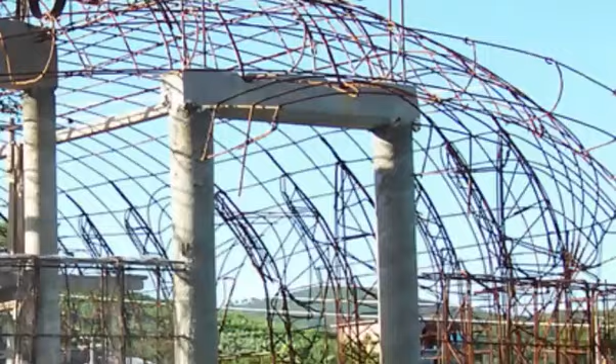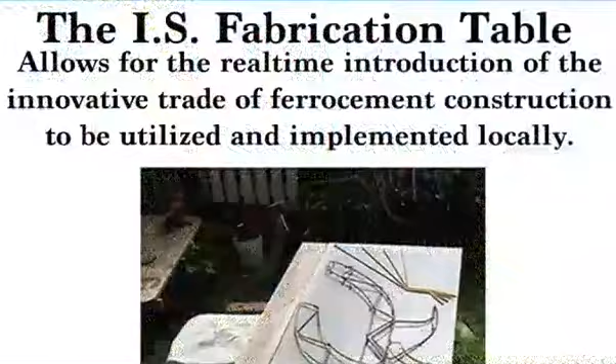There's a building that I constructed in Mexico, which everyone has seen in past presentations. There's the frame - this was done on site in Mexico, and the men working with me, when I would leave sometimes, decided it needed these columns because that's how they build in Mexico, but it does not need it.

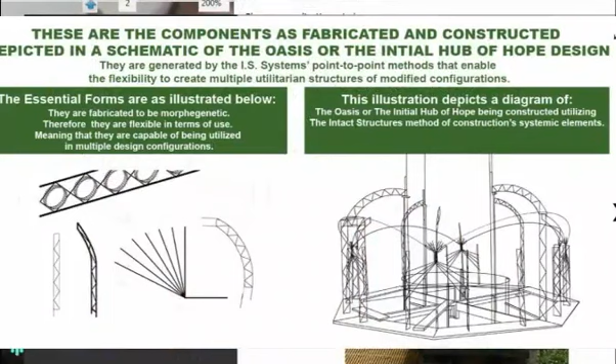That's a table in my yard. Most of my work is done in the design of the way to construct the building from these components, which you'll see they can do.

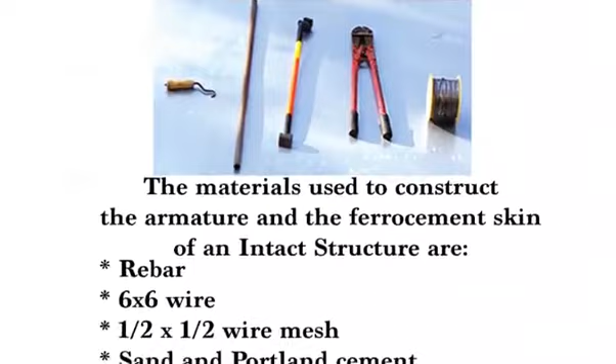I'm trying to move to the next frame. They can do multiple designs from approximately 6 components. Please move this - I don't know if I'm moving it or you're moving it. I'm not sure. Okay, this is an important design.

And the same components make this design, and I have it in my yard. Unfortunately, we can't walk outside and take a look.

Anyhow, the idea would be that it goes to where there are major problems, and hopefully there are no major problems in the future, but probably there will be, since there always is, right? And to introduce people to ferrocement construction.

Which can be taught fairly easily with this system, because it starts with point-to-point construction. In other words, the construction is built into the components. It goes together like a kit. This is more or less an illustration of the building that I built in Mexico, trying to illustrate the idea that in a tough place where people don't have much, with a few directors or supervisors, they could construct good, strong houses that would collect and store water and create a good circumstance in society.

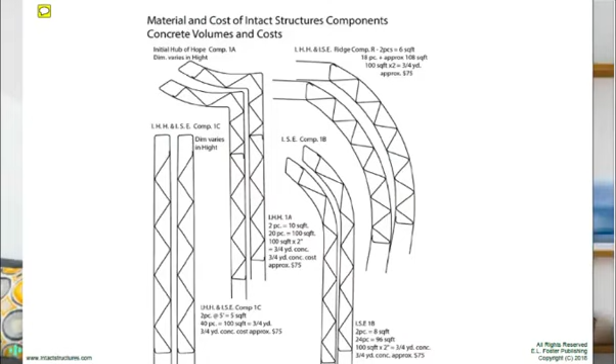And I've noticed something the more I get involved with it - it's micro maxi. In other words, the buildings, same components, you can ratio them in and out and make different dimension buildings out of the same components. Obviously, in construction, you could do that in many ways.

These components lend themselves to a ratio that I've made, which I will produce in drawings and templates that show easily. You say you want a 30-foot diameter, and I call it the initial hub of hope, the little hospital. When you get a chance, if you guys could look at the component schematics that I sent, there's another batch. Lele, did you see them?

I don't know if I sent them to you this time, but they're on my website - what I call the Asian intact structure. It has a sloping roof. Same components, by the way, and it's also in my yard.

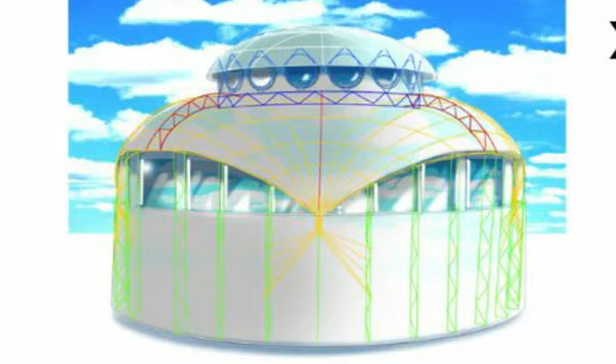I don't know if you remember, because it's not up yet, the initial hub of hope, the round building for the hospital or the food propagation. It's kind of a community building, not a house. That's a community building that had, and I'm very into this, the utilization of the attributes of ferrocement.

Ferrocement lends itself to catching a lot of water when it rains, holding the water, and making large planters, like I designed around the initial hub of hope. Ferrocement lends itself to more or less what I've written in the papers I sent.

One of the reasons they're round is because to get engineered in America, with the strength requirements, R values, and insulation requirements, you needed a cavity wall. The components do both things: they make a cavity wall and they add strength. Especially if they're precast, you can calculate their strength because it's predictable, just like the panels are predictable.

In terms of a pitch roof, I agree that as you came up, you could put the panels on. It would be the same system, you just attach the panels there. So I got it, I understand. It's not really a big difference, but there is one.

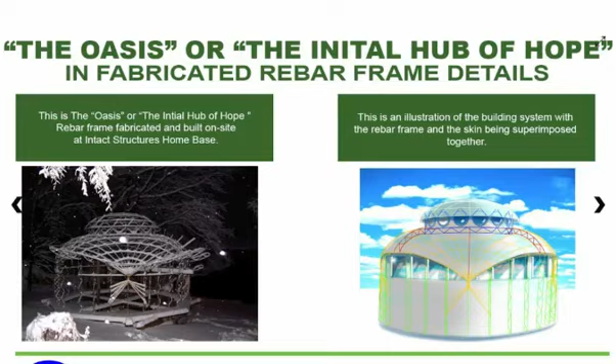Communities could grow food, go inside, prepare food, and make it much easier to feed a large amount of people in a small area that's isolated. And they'd have an earthquake-proof building that would have longevity. So anyway, there are advantages and disadvantages of both designs.

As Mr. Owen is giving stress on achieving strength through shapes and forms, simultaneously Mr. Lele is pointing out that we need conventional designs that people believe in, and it has to have good strength to bear earthquakes too, like a hybrid design. Now I would like to invite comments from Mr. A.K. Jain.

Sir, to my way of thinking, ferrocement structures in general do not require a foundation. That is my take. I may be wrong, but I have done it for the last 40 years, and no structure has given me a warning that it is not correct.

If the weight of your structure is about 10% of a normal structure, and the load you are putting on the ground is of the order of 3 tons per square meter, you don't need a foundation. The ground we walk on takes that much load and we don't need a foundation ourselves.

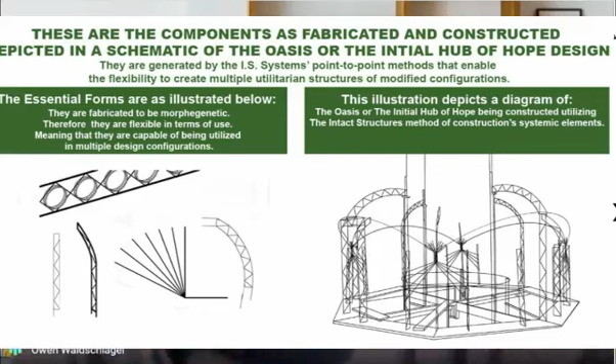There's no freezing floor in Mexico, so we use grade beams with rebar, like reinforced concrete beams. They were 2 feet deep and 8 inches wide, in a grid spaced about 10 feet apart. On that, we made a rebar cage for the slab.

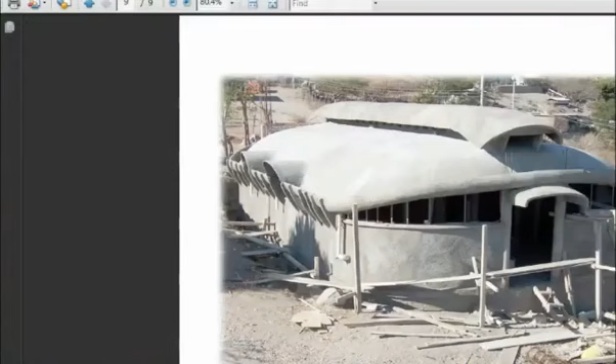We filled it in and compacted it even with the grade beams, very close, with gravel and a rebar grid with 6x6 wire. We poured a reinforced concrete mix with gravel and sand, like a 1-2-3 mix. It was a very good foundation.

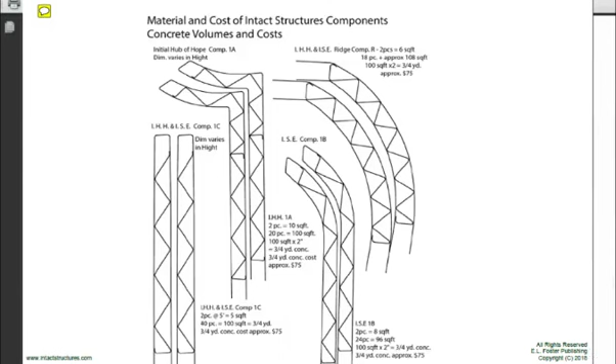We left a space for a 3,000-gallon water tank, which we put into that grade beam circumstance. So there's a 3,000-gallon water tank in the front of that building. That's the foundation that was under that, and that's an earthquake zone, in Oaxaca, Mexico.

They did have tremors, like number 5, pretty bad earthquakes in the area. Some conventional block houses got damaged near that place, but this house, not a crack. I was down there maybe 3 years ago, and I searched it for cracks. I must say it must be the sand and cement of Mexico, it must have a volcanic sense to it.

When they make that cement in Mexico, they call it Tec. It's a very good cement, high quality Portland cement. I think they call it Type 2, but again, I'm not a cement engineer, I'm mostly structural, physical things. But yeah, it was a slab, a very good slab.

What is the grade of concrete you used? We don't have 1, 2, 3, 4, 5, 6 like that - there's 6 grades, the way we talk about it. Grade 1 is what they use for foundations. Grade 2 is for water tanks, more where it's going to get wet. We use grade 2 because it seems to trowel much better on the actual building.

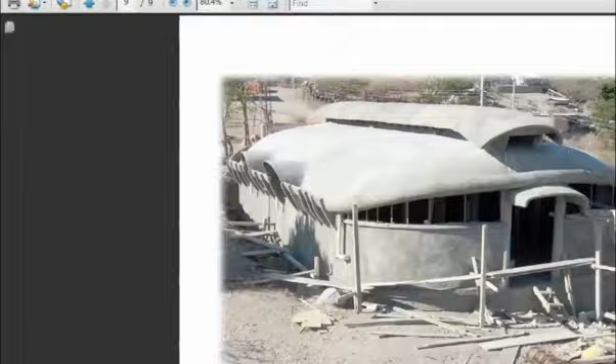They coated the roof as they coat all roofs in Mexico with some kind of roof coating. I don't know the name of it, but it worked. It wasn't uncoated - it was coated by the conventional roof coating in Mexico, and it didn't leak. The water tank holds, it was a good mix, I must say, a very good mix. It didn't leak, and the gutters work very well.

In fact, they had to build another cistern - they collected so much water when they got the raining season. They made another tank, and they drip irrigate a beautiful farm on a barren hill from the excess water they have now. Believe me, in Mexico, there's no water, but it rains.

I have one question to Mr. Owen, sir. In your speech, you mentioned the use of ferro skin on the precast units. Can you throw more light on this, where you have used it and in what way? Yeah, the idea would be mostly so you could prove to a building department how strong the building was, because if you just depend on a ferro cement building that's troweled and only the skin, it's very hard to calculate that skin.

If you have frames, which are the components I talk about in the schematics, and they're precast, they can monitor the cement mix, the dimensions, the porosity. They can say it's a precast component. You install those components first, leaving inserts where you can slide the rebar through to take the skin wire. The skin isn't doing the same type of strength, so you can structurally say these components are this strong, they do this. The skin is just augmenting, adding to the strength, which Dr. Naveed Anwar at AIT did a finite element analysis of, beyond the engineering work done at Axis Design Group Engineering.